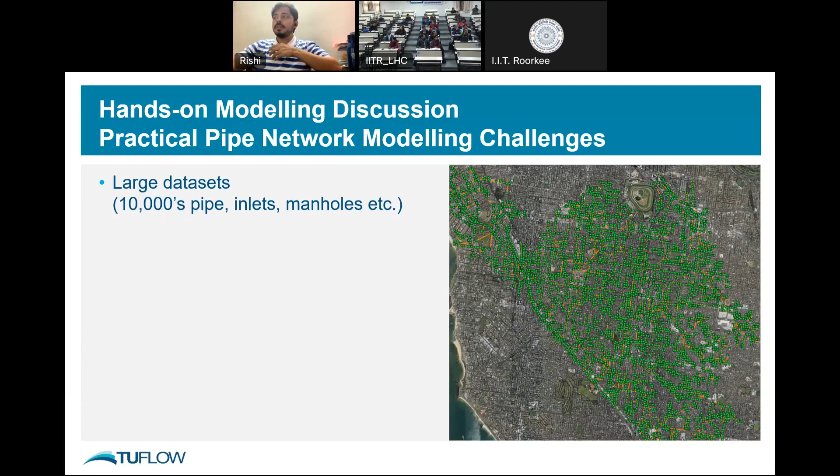So these are the inlets. As I said, inlet means it is the point where overland flow is transferred to the underground. So that is the inlet. These are the points at the inlets and manholes.

Any data set will have varied quality. You can see the connectivity of the pipe to this main pipe—it is not connected, you can see it is unsnapped. So snapping issues will create a lot of problems, and you need to rectify those. It's not possible to always go one by one and check all these, so we have some tools within TUFLOW.

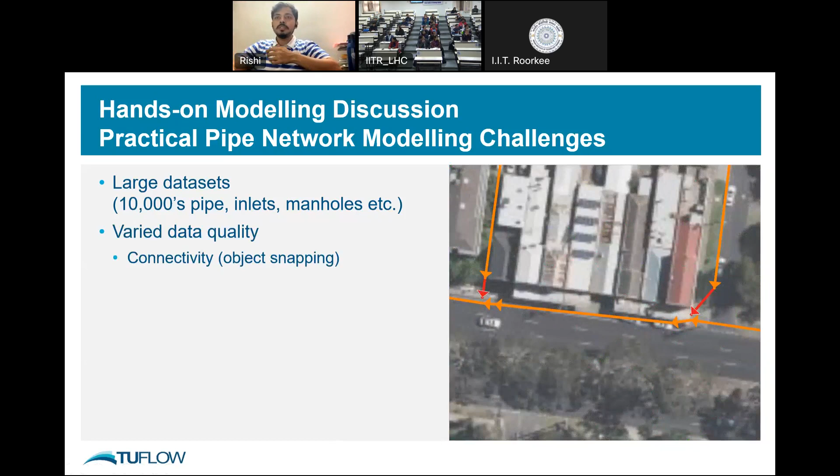I'll explain. The other most common issue is object digitized direction. You can see this pipe network, and this one pipe in red color is digitized in the opposite manner. This is the pipe flow direction, and it's digitized the opposite way, from downstream to upstream, so this is not correct—it has to be in the other direction.

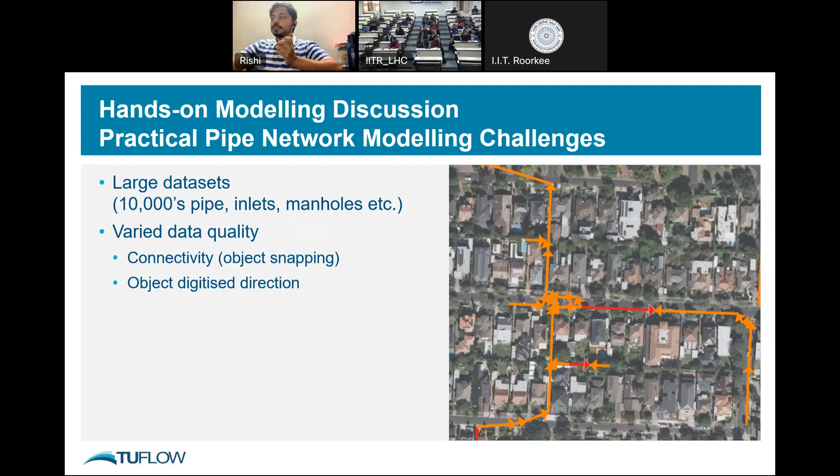These direction checks we can also do in TUFLOW. Another example is the inverts. You can see this pipe long section—this pipe is clearly the odd one out. The invert of this is not properly aligned with either the upstream or downstream; it has to be in the opposite direction essentially. These kinds of checks we can do.

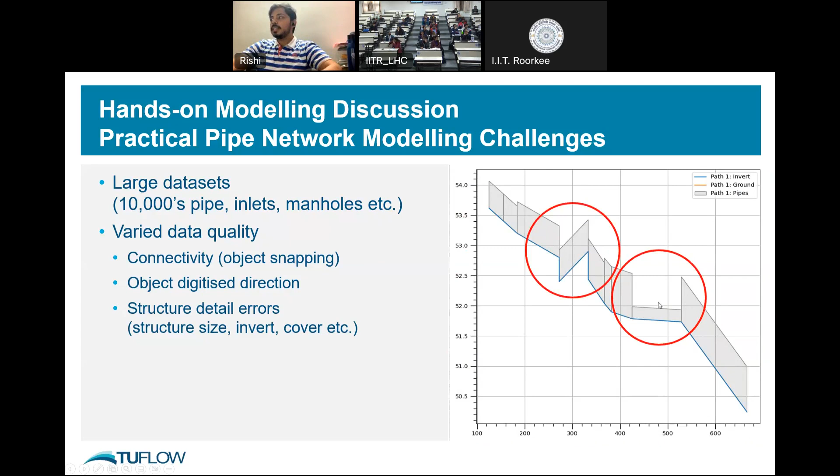So these are two various things, and you can see this also—it is not a fit, even though it might be correct, but not exactly. This just shows some of the checks we'll do. Even though the inverts are okay, the size you can see upstream and downstream is a bit different. As with any modeling or design, whatever input data you give in, that will determine the quality of your output results.

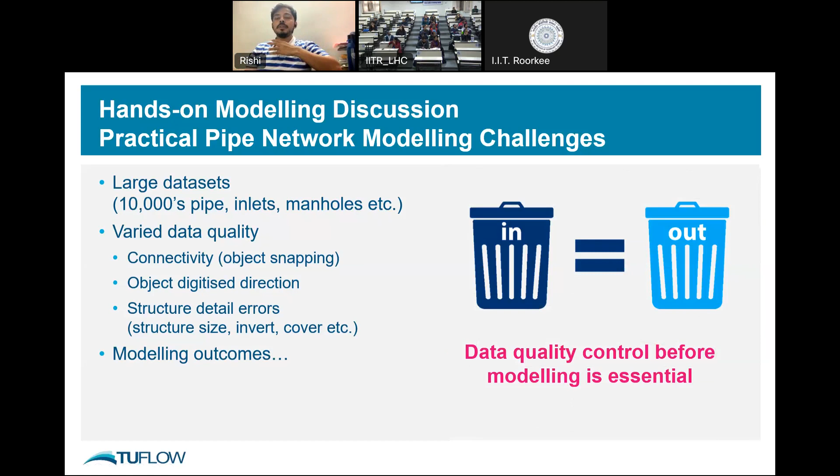So you always need to make sure the data going in is correct—be it the digital terrain elevation data sets, the land use land cover, the pipe data sets, or whatever inlets you have. All these outcomes will depend on the outcomes of your modeling results and what applications it's being used for.

Okay, now it'll be a bit of a hands-on session. You won't be doing it manually yourself, but I'll show you one by one what we are doing.

So one thing is, this is a QGIS workspace. I think most of you already know about GIS or QGIS. QGIS is a free source software which is widely popular, has a large user base, and a lot of free plugins. One plugin, as I said, is the QGIS TUFLOW plugin.

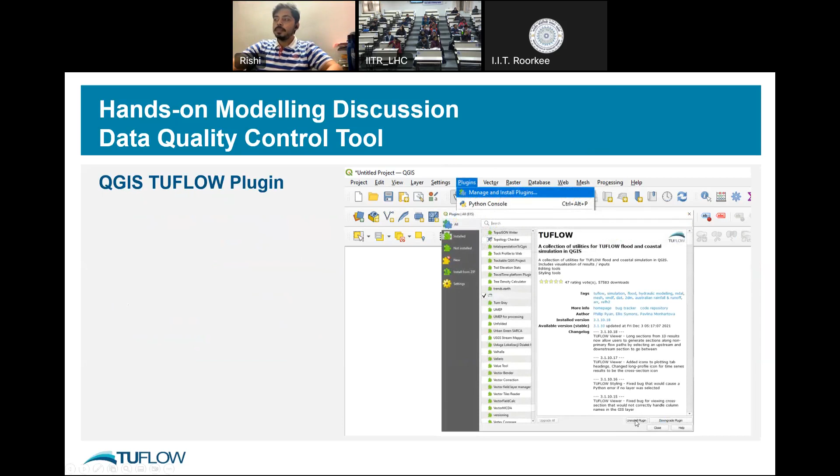So I think you can install that—if you haven't installed it, go to Plugins and Manage Plugins. There, you'll find the TUFLOW plugin. Once you click on Manage and Install Plugins, you'll get this dialog box. Just type in TUFLOW here—this is the TUFLOW plugin, click install. I already have this plugin, but for you it will show as an install plugin option, so you'll install that.

Next, once you install that and go to Plugins, there's a TUFLOW menu. In that, these are all the TUFLOW options available which you can use for your model build. Today, what we'll be using is the 1D Integrity Tool. This is a tool for urban stormwater networks, or for whatever checks I told you about previously—for all these checks, we use the 1D Integrity Tool.

This tool is developed in Python, and even the Python code is freely available for this tool. So if anyone is good in programming and wants to modify it based on their requirement, they can use that. These are all our different Python tools developed by the TUFLOW team on an open source QGIS platform.

So if someone is very good at GIS, they can use their skills in GIS as well as integrating with TUFLOW. I'll show you what is there in the integrity tool. In the integrity tool, we'll be doing checks like snapping, pipe direction, network continuity, and flow trace. We'll be seeing what each of these contains.

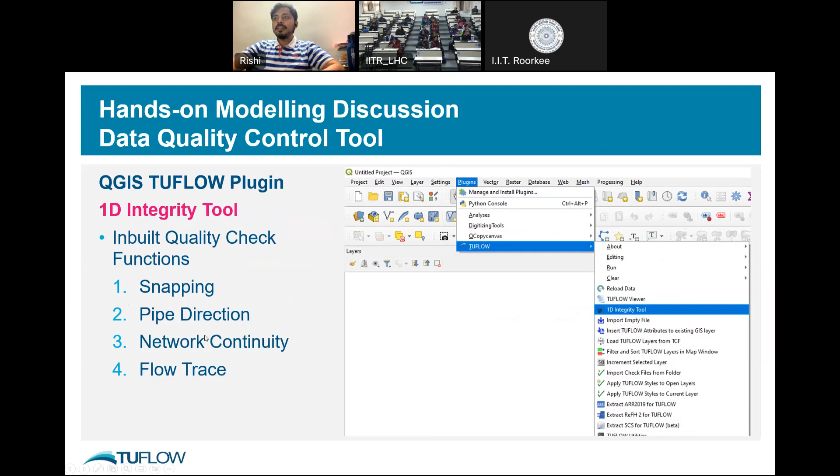Let's take one example. I'm not sure which area this is, somewhere in Australia I guess. So this is a pipe network. Now we'll do a demonstration of the snapping issue. For that, let's go into the 1D integrity tool, plugins, TUFLOW, and integrity tool.

So now this is the integrity tool which you'll be getting. You'll be having input network lines you need to give here - what is the shape file? TUFLOW is always dependent upon shape GIS files. So whatever is your pipe network as shape file, you'll give it as input, and this is the network points - whatever is the input pits or inlets, you'll give it as well. One is the lines and the other is the points. Once you've given those two, that's one input which you have to give. So the input layers, you just specify and click this plus button to add that into the tool.

And there's another section called QA QC functions. This has all the functions - you can see snapping, pipe direction, continuity, flow trace, and channel ID. All these functions we'll use based on our inputs. Whatever inputs we give, it will process into these functions, basically we call it. We'll look into that now.

So now this is the pipe network. Just adding that pipe network, and we are adding the points, which is inlets. Now we'll go to the snapping button. This is the snapping tool check which we'll use. Just click on run. Now you can see these are the points where TUFLOW finds errors with snapping. Let's see what errors it has.

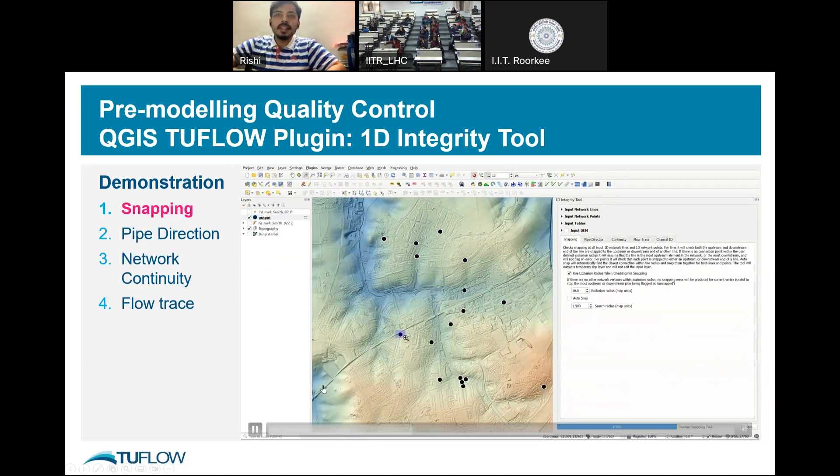Excuse me Rishi - what is the physical meaning, so we're all clear about the snapping? Okay, so what I'm saying about snapping is, if any pipe network is there, one pipe connects to the other pipe, but in GIS it's not connected basically - there's some gap. You can see the gap here. Even though from zoomed out it's showing as connected, you can see it's not snapped properly. So that is the connection basically - the pipe should be connected, it's a connectivity issue. Yes, definitely correct - that's the error in digitization. So in few cases, by mistake we don't snap it because there are a lot of pipes and it might get here and there, so it will just show you the errors which it has.

So now, for example, this is one connectivity-like snapping issue - it's not snapped. Now what we'll do, if you have this option ticked as auto snap, whichever pipes are within some radius - you can give a specific radius - within that radius it will snap all the pipes which are within that. So if you give a small radius like 2 meters or 5 meters, within such radius it will snap all the pipes into one junction basically. So just click on auto snap and run button. It'll create a new file - you can see this is the new layer which it creates with the snap option.

I'll just show you that. Yeah, so now you can see it is connected now - it will automatically create a new layer with the connected ones basically. So now it is all connected. But how is it going to take into consideration the direction of flow? Yeah, the direction is the next tool. So when we're drawing the pipe, we have to connect that, meaning we take upstream and draw downstream - just try to direct in that direction. So from upstream to downstream, it will take what we're giving, but there is a check for pipe direction as well. I'll tell you about the next tool.

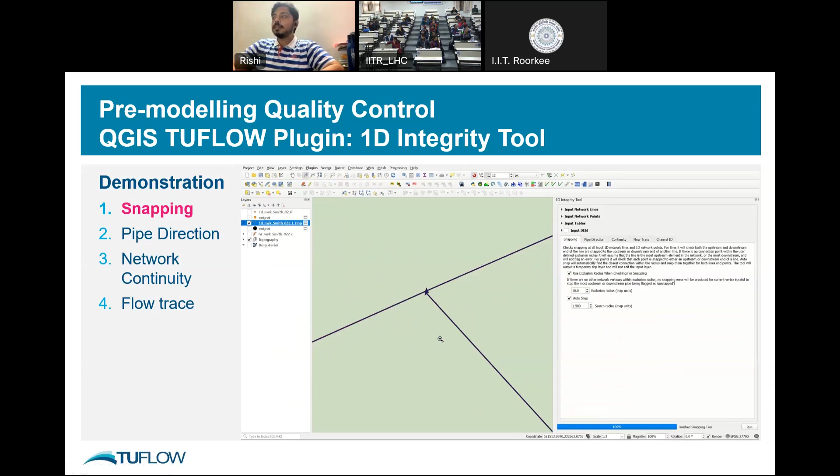This is about snapping. Now I'll tell about pipe direction - in the same section, the next one is pipe direction.

So they have some feature where you can check the pipe direction and it will correct based on the selected rules. There are two rules here. One is based on pipe direction continuity. I'll just tell what it will contain, with an example.

So I'll just run it and show you what it is. Once I run it, it will show some errors. It'll show some layer which will have some errors. This is the layer which has output as whatever we ran. So these are the 3 points which are having pipe direction issues.

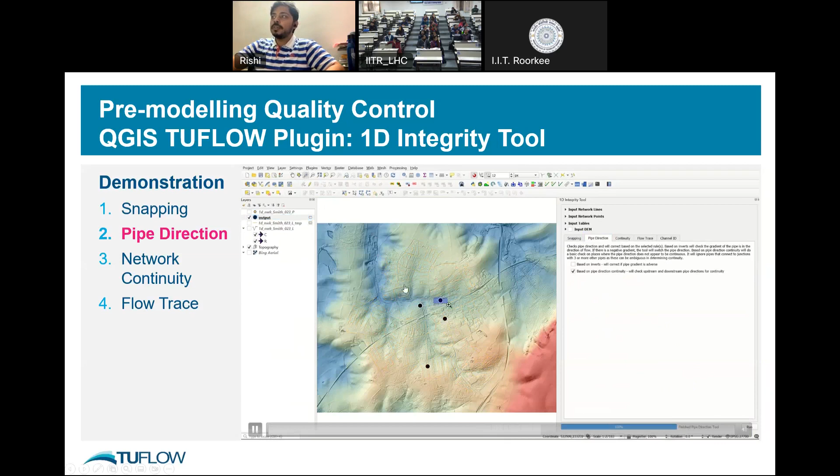If we just zoom into one area, so yeah, this is the area. Now we can see here this is all along this direction, but this was digitized in opposite direction. So it will show you the label as 'has been reversed'. So whatever we want, we have to reverse this pipe direction in this direction. It will show you which are the places where we have to reverse the direction.

So this is based on continuity. If the flow, all the pipes are in this direction, so the continuity has to be in this way. But this pipe was digitized in opposite direction. So it will change it to the continuity, whatever it is, and it will show us the output. It will give us the modified layer as well, which we can use for further analysis. So one thing is it will identify the error and it will also correct the error.

In most cases, most software will just identify the error but won't automatically correct it. So this is also one good feature in TUFLOW - in the tool, we can correct it as well.

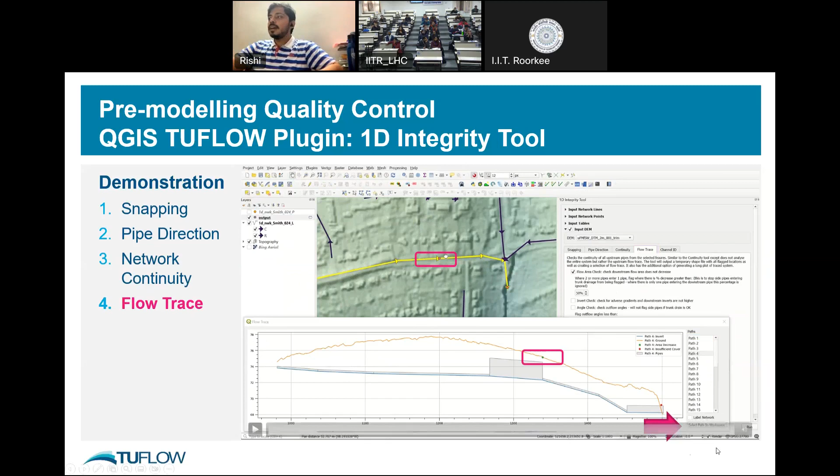Also there's select path in workspace. If you select the path in workspace, it'll show you that path. As you see, this is one outlet, so this is one of the flow paths for this outlet pipe. In similar way, there are different paths, maybe around 20 paths in this model. This one outlet will have different paths - path one, path two, path three, and various paths within that. So this flow trace is very useful in checking how the long section view is for each path, and we can visualize that graphically as well.

So we can also label the network. The pipe names can be labeled based on each of these. I'll just show you - you can see these are each of the pipe names, and those pipe names can be labeled in the viewer.

In similar way, you can see all the different pipe networks with different flow paths. The orange line is the ground cover level, which is the ground level. You can see one check which shows that the pipe lays higher than the ground level, which might not be correct. We have to check why it is going beyond the ground level - this is the ground level of the terrain topography.

So this is all about flow trace. For any other long section also we can visualize in the similar manner. It'll just take some time to calculate, but I think you have understood what I wanted to show.

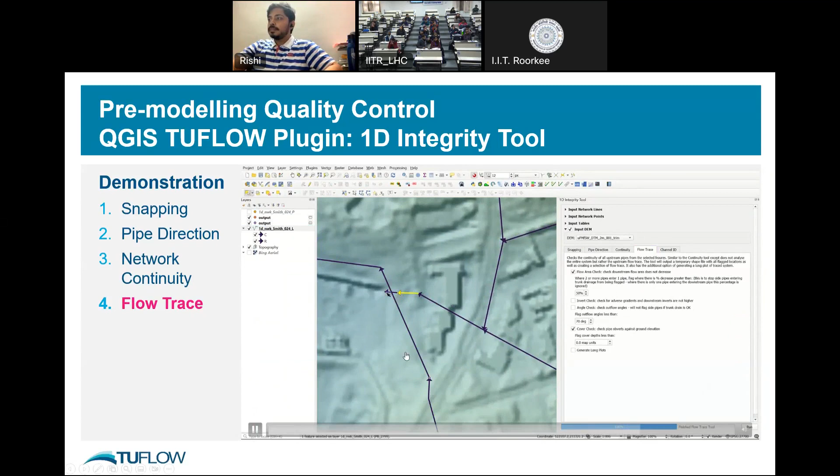So for this outlet, this is all the upstream sections for this outlet point. This outlet might be different, but this is for a separate one. Now suppose we calculate for this outlet - all the upstream of that outlet it will select, and we can see one by one what it is.

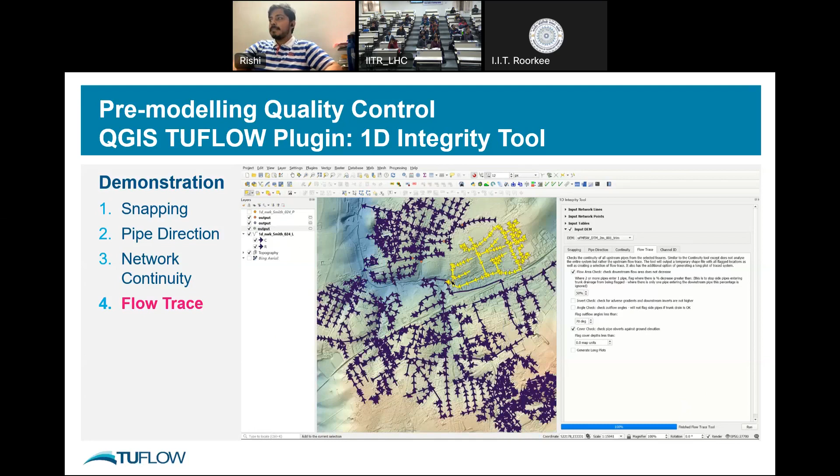Okay, so now we'll see a bit. Sir, which layer is that in the background, sir? Is it a satellite image or digital elevation model? No, it is digital imagery, a DTM. We just added a hill shade to visualize it a bit better.

How directly are we getting elevation or gradient information - is it surveyed, or are we extracting elevation from that elevation model? Yes, okay - you're saying the DTM has some protrusion, a kind of 3D effect. In QGIS, whatever DTM is there, if you add that hill shade, it is called so, and we can visualize it as a three-dimensional topography. DTM has the topography values, so once we add that hill shade, it gets this three-dimensional effect. Because in the public domain, it's freely available only at 30-meter resolution.

Okay, so this one has a 1 meter resolution. The DTM is 1 or 5 meters, I think. I'm not sure, but it's around 1 meter. It's a quite fine resolution DTM.

So which DTM are you using, sir? Yeah, this is LiDAR based data. So it's around 1 meter, I think, or 5 meters resolution. I'm not sure.

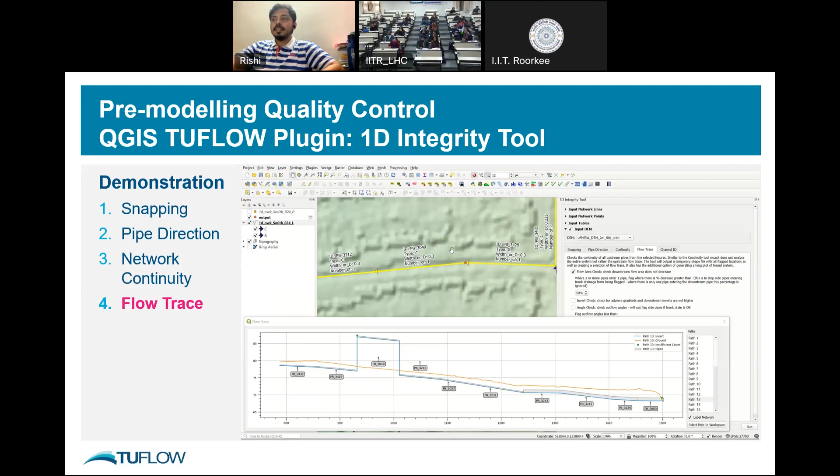So we'll quickly go over some of the results. Once we run the model, TUFLOW will give you shapefile based results as well as CSV, so that anyone can use it without a license. They can just load in the results using something called TUFLOW Viewer, which we'll use to visualize our results. This is again a Python plugin developed by the TUFLOW team. So we'll just load in and visualize some of the results which we have got.

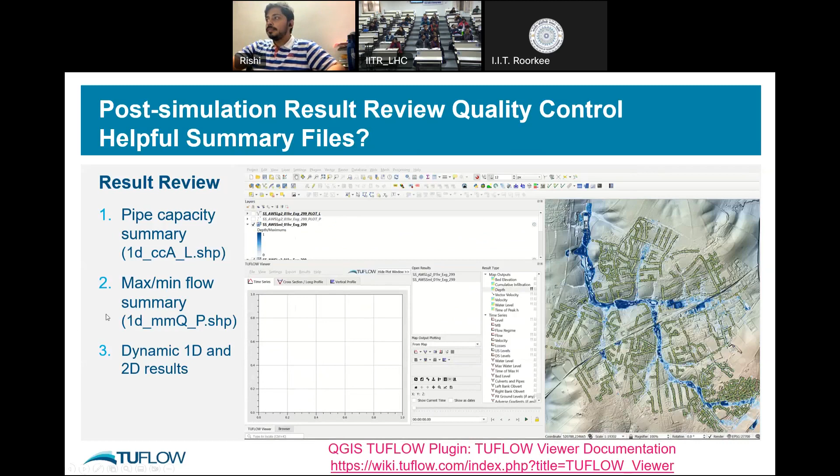One of the results was this shapefile called 1D_CCA_L. This is a summary for pipe capacity - whatever are the flows, maximum flows, time duration, and percentage of maximum flow. If you see the attribute table, you can see what is the area max, percent time full meaning percentage time to full, percentage full maximum, duration full and 10%, and surcharge. So these are the different options which we have - basically a summary of the pipe network.

So one good thing we'll see is that we can symbolize that based on an area. I'll just show you, one second.

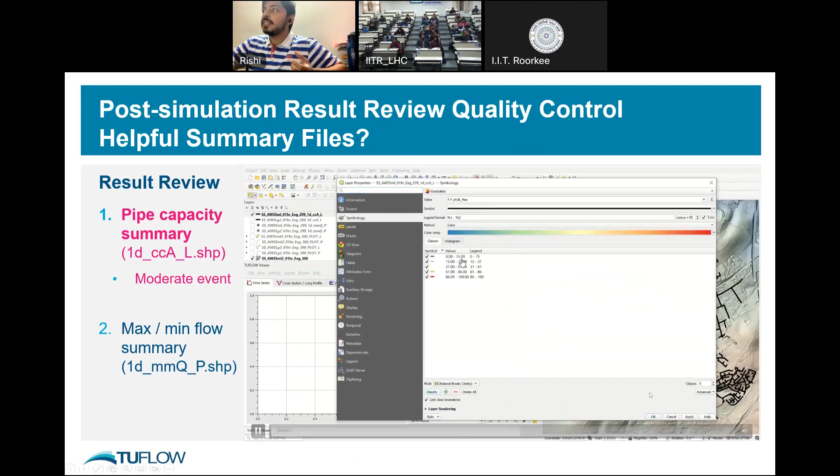Okay, so based on percentage full maximum - what is the maximum pipe capacity which is carrying - these are the percentages, 0, 15%. We'll categorize that in QGIS, and now you can see which are the ones. The red ones have higher full capacity, and the blue ones have lesser capacity, so you can visualize which areas are having full capacity. If you see here, these two pipes are red, meaning high capacity, fully flowing at full capacity. In between is the orange one, which has lesser capacity. So we have to see if that is correct or not - those are the things which we can visualize.

In a similar way, we can even have time series. So there's an option for time series. If you select any one of the lines for the pipe network, select your time, selecting the time series - we want to know the time series of the pipe. Once you select the flow within that, you can select any pipe network. Just select that pipe, just a minute. So yeah, this is the flow within that pipe network across time. You can select any number of pipes, and that will give you the time series for each of the pipe flows.

And there's another option for cross section or long profile, if you want to see the long profile view. You can use that cross-section long profile tool. So it says, for example, you want to have a long section plot between these two selected lines. You can plot this long section profile, and then plot the water level - what is the water level within that. I'll show you that next.

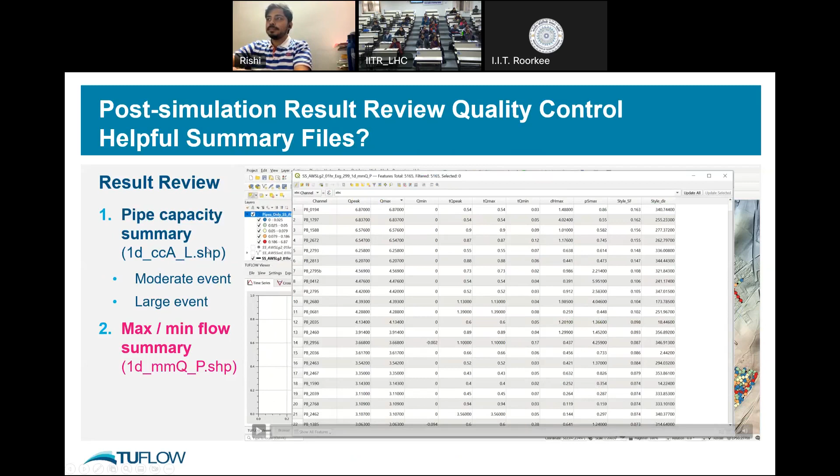So this is the example for MMQ - what is Qmax, Q peak, time to peak. Based on these, we can symbolize in our QGIS. The other part is plot, so with the plot I'll show you a few things.

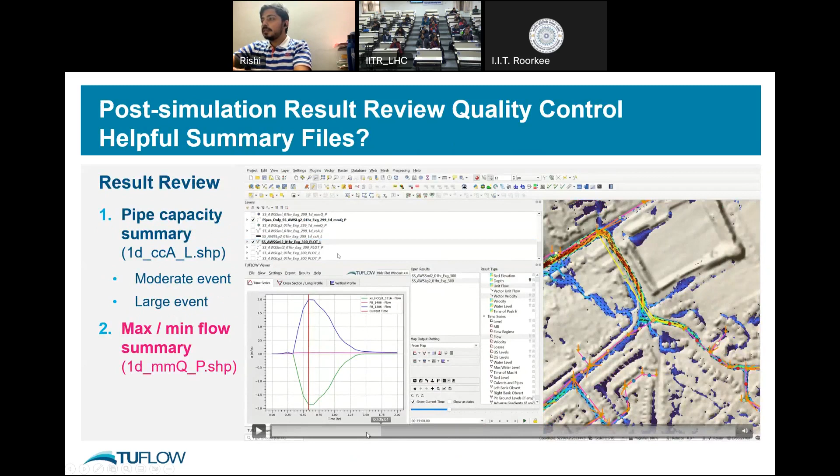So here, one thing is we have to do the modeling. Once we have modeled it, we have to use the calibration data. Usually the calibration data might not be available, so we have to go to the council for the stormwater hotspot register and see what is the documented water levels and other aspects. Or in India also we have some river gauges, or we know which areas get flooded. So once we build the model, we have to calibrate the model against it.

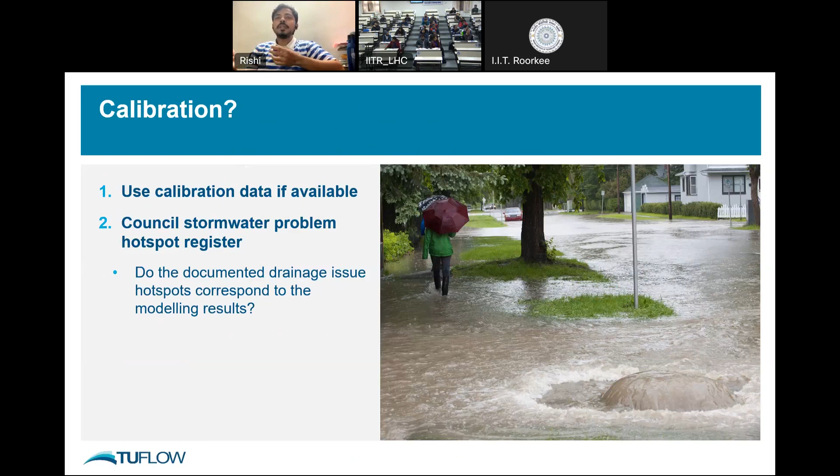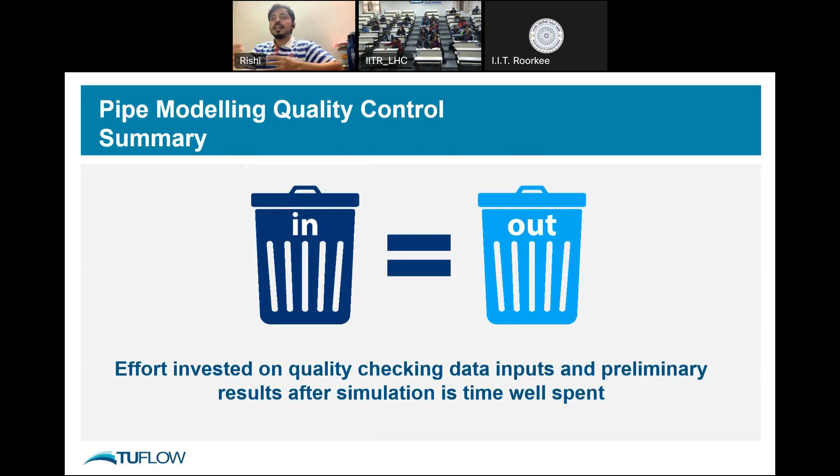And as I said, the effort which we invest in quality checking data inputs and preliminary results after simulation is very good time spent. It's not like wasting time - we need to make our quality checks of the input data as good as possible so that we can rely on our output data, whatever we have.

So if you have no questions, I'll show you the real-time example in my QGIS workspace.

Rishi, one question I will have is that - yes, okay yes sir - in case of some manholes overflowing, that means the carrying capacity of the pipes is limited. Can we think of putting some detention ponds in the upstream so that we can minimize the flow in the pipes without enhancing the capacity of the pipes, because that can be more expensive? So is that possible using the software?

Yes, so when you say detention ponds, or even we can divert some of the flows in the upstream - when you say ponds, there's a capacity for infiltration. All the detention ponds will have higher infiltration rate. So those infiltration rates we can incorporate in that area, so that all the flows will get infiltrated rather than going into the inlet pipes. We'll avoid that, and we'll have a higher infiltration rate in the upstream area.

Or even we can control the Manning's roughness - we'll have a higher Manning's roughness so that the water will be ponded over there, and it will have a detention kind of effect. So those aspects we can consider in the modeling part, and then it will route the flow in the pipe networks. So we can run the model again and see the impact of those infiltrations.

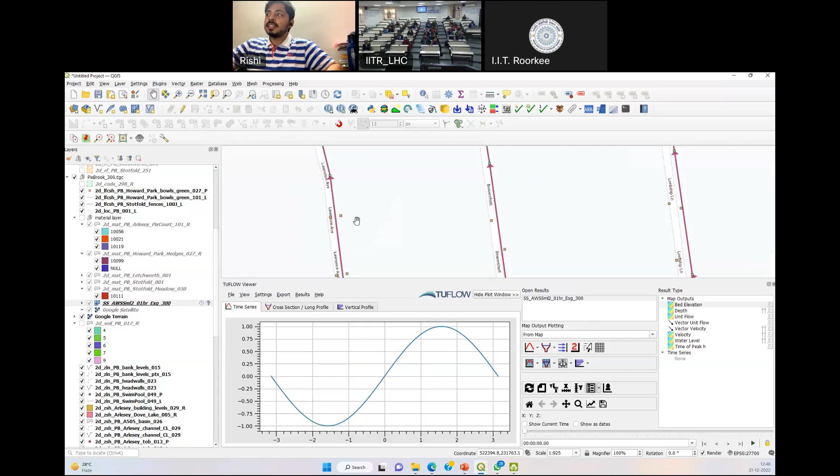So we have two things - one is pipe network and one is inlets. You might see some of the inlets are not connected to the pipe, but what TUFLOW does is within a certain distance, these inlets will be connected to the pipe. Say suppose if you have an inlet placed here where my cursor is, it will not be connected to anything. But if it is within this pipe radius, it will connect that inlet, whatever flow is coming in, into the pipe network.

So this is all the pipes and inlets we have, and these are the two important inputs. The other input is the DTM. I have the DTM file - it's quite a big file to open. I'll just try to open it.

Not sure, okay. I think it will take time to load the DTM. But this is we have a DTM based on which we'll have an overland flow mechanism. And so these are the files. And apart from that, we have a land use land cover.

So for that, might take a bit of time. So we have land use land cover for the Manning's roughness. Based on the Manning's roughness, it will route the flow across the channel. And that's all we are having it here.

And you can see we also have a soils value, 2d_soil. This is soils value, so we'll be giving infiltration. TUFLOW has the capability to take infiltration based on Green-Ampt as well as Horton's, and initial and continuing losses. So these are the three common methods where we can take the infiltration. For Green-Ampt, we also have an option to take the USDA soil. So if you specify this is sand, sandy clay loam, and all those values, based on the USDA specified hydraulic conductivity, porosity, it will calculate based on that. Or else we can give our own specified porosity and other aspects in this 2D soil. We just have to specify the spatially soil parameters and then give the respective details for that.

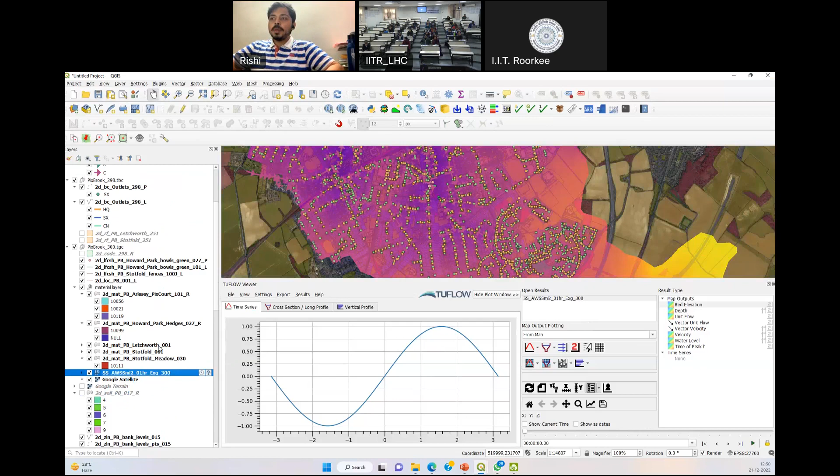Just a minute, I think I've got this, this is a satellite image. So you can see these are the Manning's roughness values. Manning's roughness, when I say it, is just the values for, say suppose these are the buildings, say these are one of the residential areas. So this will have a higher roughness, and the roads will have different roughness. So that is what I mean about saying the roughness parameters is what we'll be giving it here.

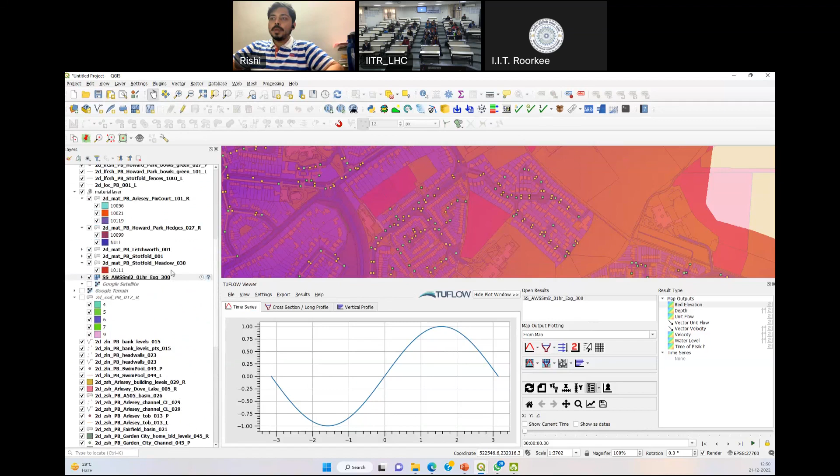So this data is quite extensive. So if I want to show you some of the results, apart from, so this is the Manning's roughness, and also there's a file for, just give me a minute. I'll just turn off the materials value. I'll show you there's another option for soil.

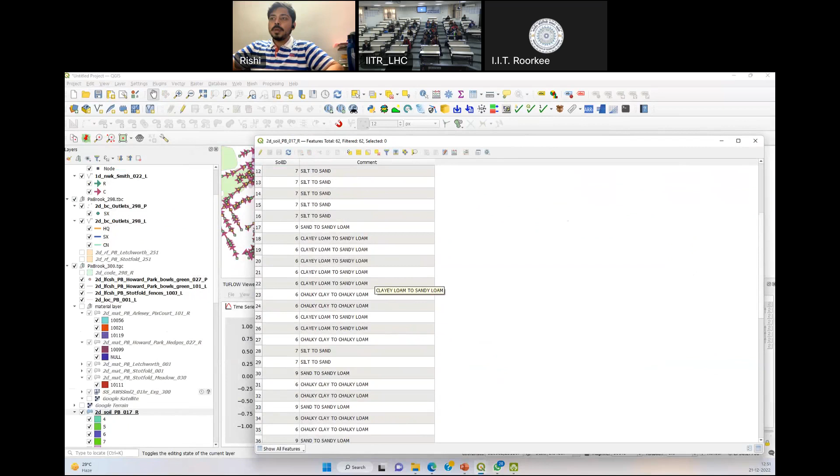So I'll just say when I said soil, so these are the soils values. To see what is there in soil, just open the attribute table. You can see it just has a specific unique ID for what type of soil it is, so clay to sandy, loam, peat, loam. All these values, the values for these are there in the reference manual for USDA. USDA stands for US Department for Agriculture. So they have specified conductivity, porosity, and those things. If you don't want to use those, you can specify your own values, parameters for that, for infiltration. So these are the soils, it has different soils for this.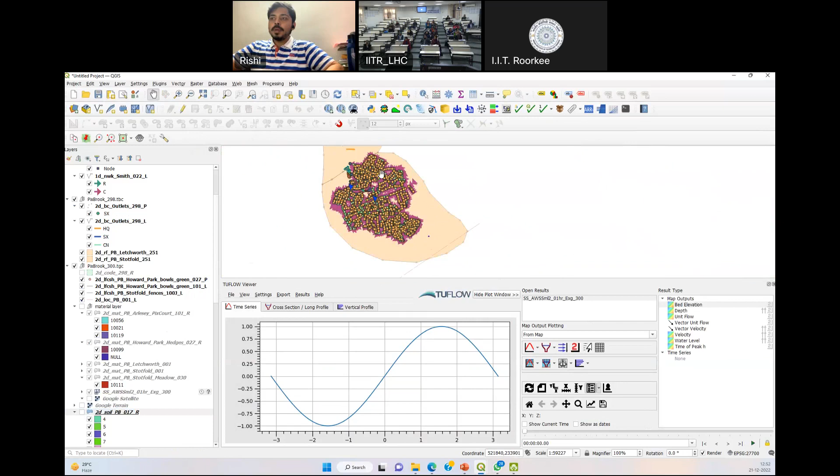And we are applying a rainfall as well. So these are the rainfall. We have to apply different polygons for rainfalls, so all this polygon will have a kind of constant rainfall. But if you have any grids or any other way, we can apply the grid based rainfall, or even if we have rainfall gauges, we can apply the rainfall gauge at locations, and it will interpolate based on Thiessen's polygon value and everything, and let me create a rainfall grid for you to use.

So this is all about that, and maybe I'll show you the output. So once you load in the results, it will have the bed elevation, depth, unit flow, vector velocity, water level, time to peak. So again, there are lots of outputs it can create, but for now I've just shown you a few outputs. These are the outputs, I'll show you one example here. So if you just specify the depth as max, I'll just show you the result.

Yeah, and you can see this, right? You can have an option to animate like this. This is a time series slide, and you can animate it like this.

If not, you can also use an option for maximum. If you just specify this as maximum, you'll have the maximum depths. You can see, like for most of the stormwater network, it will be along the pipe, because the drainage path will be along the road network. So you can see all the road networks which get flooded, and what are the depths. So you can have the depth, water level, velocity.

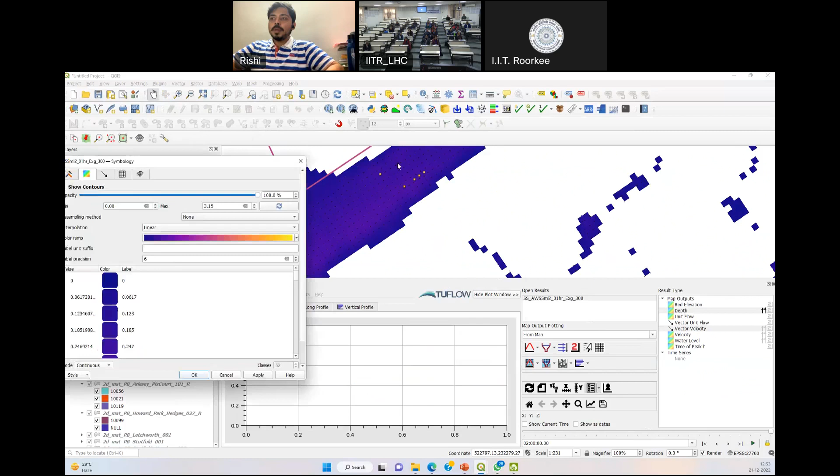You can also turn on the velocity vector like this, so now we can have the velocities. Let me just expand it and show you. Here for the velocity vectors, you can even specify as 3, and now we can see the velocity vectors, which direction it goes and how it is going.

So you can see these are the pits. Now all the overland flow is being directed into these pits, and from these pits, it will be directed into the channels here. So that is one way.

We can also, with this time series and cross-section profile, visualize the long section and the water level within that. I showed you in previous presentations, right? So you can use all these to plot the time series and cross-section. So this is for 1D, and for 2D, we can use these outputs. This is about the general approach that we use.

So you can see the direction of flow here as well. This is all about one area in UK—I think this is London, which they have developed for a stormwater network for a small area, not all of London.

But what I'll show you is another example, which I was doing last week. I was working with IIT Delhi for development of an urban stormwater network. This is almost all of Delhi city. So this is the Delhi city, for a majority part of it, and this is the urban stormwater network.

And I've got rainfall data from one of the IMD stations for the 2009 floods. There was a flood in Delhi city in 2009 on July 27th, a kind of huge flood. For that, I had got this Delhi master plan data for the stormwater network.

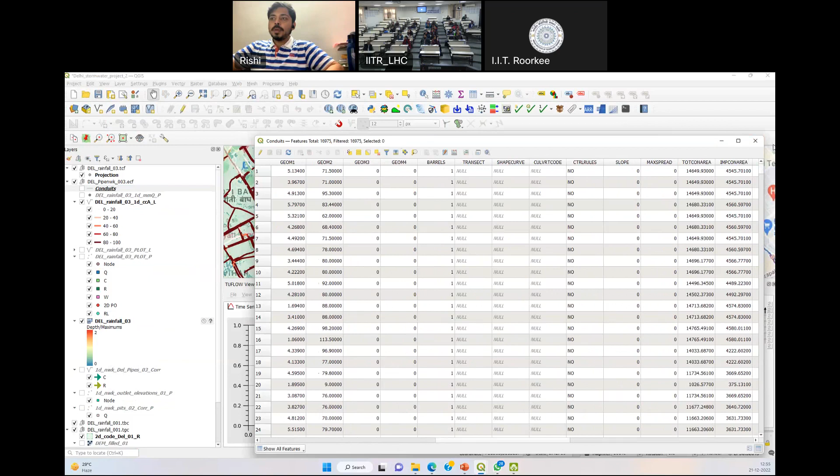So what I've done is I just taken the data, the pipe network data considerations and the DTM, and built this model. With this model, I ran TUFLOW, and these are the depths which I'm getting—it might not be very visible because of this, let me just turn this off. So you can see these are the depths in different parts of Delhi city.

I've also categorized it based on the percentage of flow. If you remember in my previous presentation, we can categorize it based on P full max—what is the percentage full maximum. So 0 to 20%, 20 to 40%, 40 to 60%—what is the capacity of pipes. You can see all the pipes are almost red, meaning full 80 to 100% capacity. All the pipes are almost running at full capacity except a few.

So we have to go in and see why these are not fully utilized. It might be due to some losses or various cases. Essentially in any flood situation, we have to make sure all the pipes are fully utilized, because that is what the pipes are meant for.

So in a similar way, these are the flood depths, and it has good data sets basically. This is what they are now trying to use to replicate for the whole of Delhi city and then utilize for the transport department. So that is what I am working on in coordination with them, to develop these models.

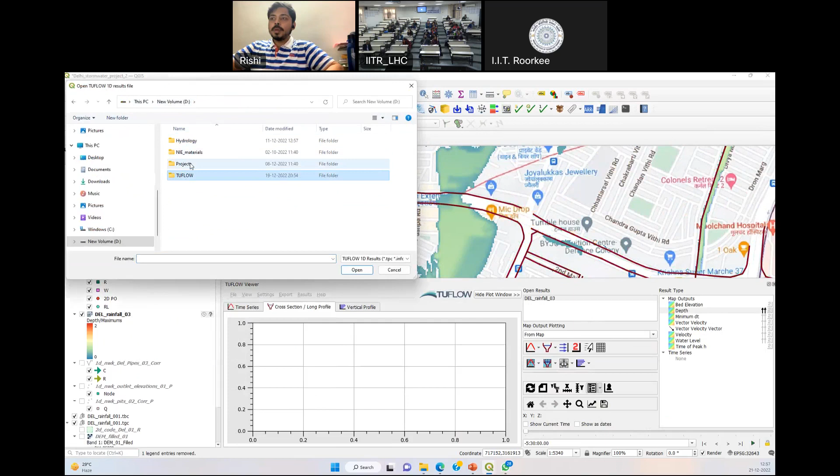So if you want to load results, just click on the results, go to load. I think you'll understand once you start learning the software. So now I'm just loading in the results.

Okay, now once the results are loaded, I want to understand what is the flow within this pipe and whatever is flowing. I'll turn on the culverts and pipes here, and the water level and maximum water level. Now I'll select to see what is the flow through this. Just select on that, and it will select all the downstream pipes of this. So these are the downstream pipes, and you can see how the pipe network looks.

Suppose if you want to know what is the flow in these two pipes, you can select these two pipes and this. So this is the flow.

And if you want to know the pit level and the inlet levels, there's an inlet level here. Let's see, yeah, pit ground levels if any. So you can see these are the ground levels, and this is the maximum water level. You can play through this like this.

Yeah, so you can see it rises till this extent, and this is how the flooding occurs. And as I said previously, you can even plot the velocity as well, as a vector.

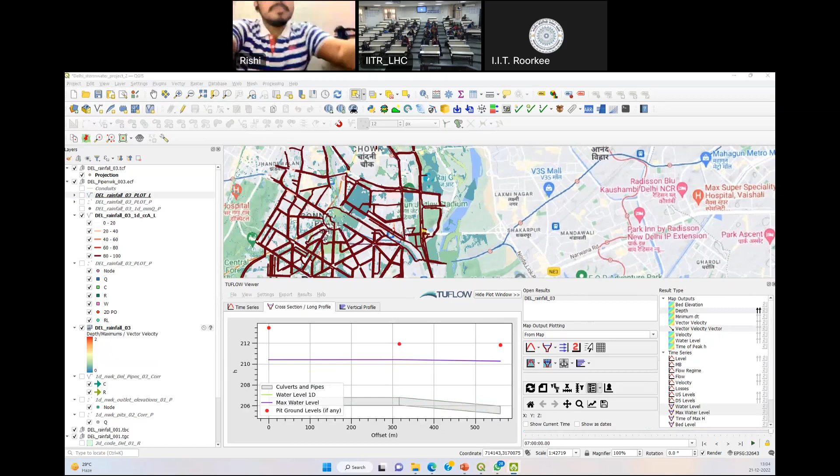In reality, there will be some sedimentation within the stormwater entering the network. But because of a certain velocity within the system, it will be carried away. If the particles are larger, they will settle down the moment there is less velocity to carry those particles. That's why in some regions we need a maintenance regime on a periodical basis, to understand which areas will be more affected by sedimentation over time, because that reduces the carrying capacity of the system. That's why ongoing maintenance is very important. Over time, operators or managers know which areas will be more affected, and they develop a periodical maintenance regime to account for that.

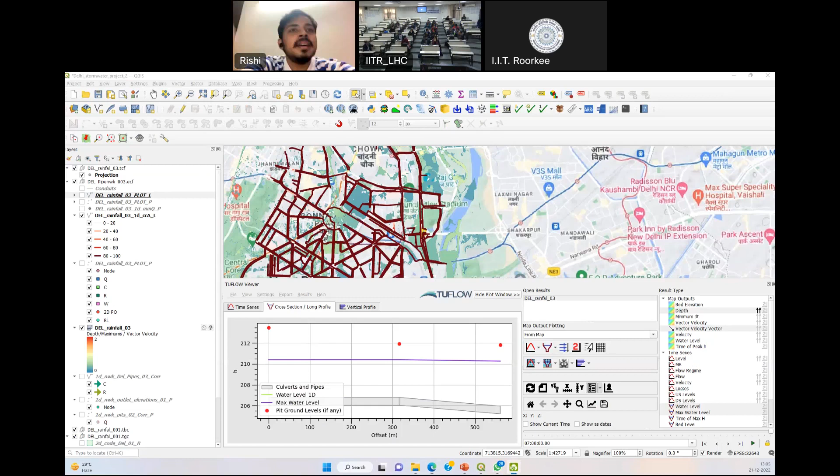Maybe I'll just show you for 2 more minutes. I'll show you TUFLOW's website, which might be useful for others to go through. This is TUFLOW's website if you want to check it out. One good thing is if you want to learn from tutorials, you can go to the TUFLOW Library Wiki. While it loads, this is the QUDM manual, the Queensland Urban Drainage Manual.

I sent this to the professors, so maybe they can share this manual. It's freely available and has good understanding about different contexts and details of design for Australia, but some modeling scenarios or other aspects can be understood here too. So you can go through this if it's okay, and I'll show you about the TUFLOW Wiki.

Once you go to TUFLOW Wiki, let me just open it. These are the examples which you have, 2D base model topographic updates. All these models, you don't need any license for, they run license free. So suppose now what we did, the integrated urban drainage, this is a model which is freely available. You can use that for learning purposes.

Apart from that, there are example models, around 140 standalone example models which you can use for learning purposes. As I said, there's always a demo version where you can run any of your models within some specified time frame, as long as it's a smaller model. So that is all about this.

TUFLOW also does a lot of modeling videos, publications, and benchmarkings. You can go through these manuals as well. Maybe this is the pricing page.

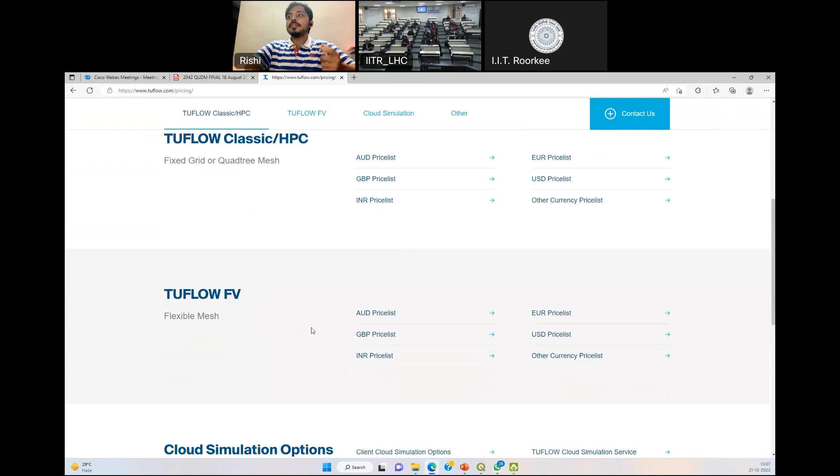This is where what we discussed is TUFLOW Classic or HPC, the fixed grid approach, used for river modeling or urban stormwater networks. As of now, for INR we have the price list, and we can use it for that. This is for FV, the environmental approach for sedimentation, water quality, and other aspects. So this is all about this, I think you can go through this, and that's all.